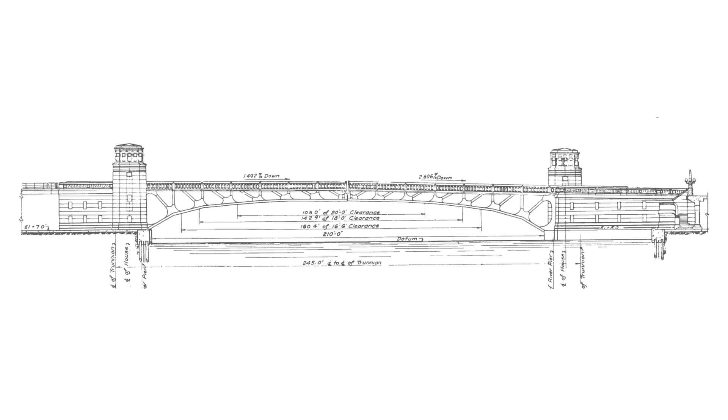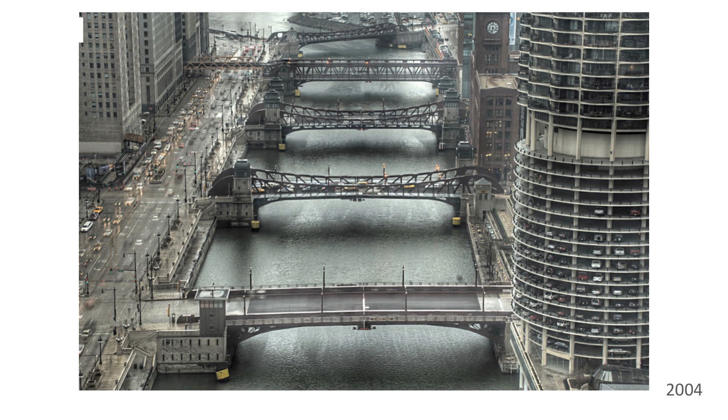This is the State Street Bridge. The only thing is, if you look here, the promenade doesn't go through. That led to the space we were presented with, this little sort of leftover industrial remnant. People sort of knew it was there—maybe they went down when they dyed the river green—but it was a leftover, and a leftover in the middle of our city.

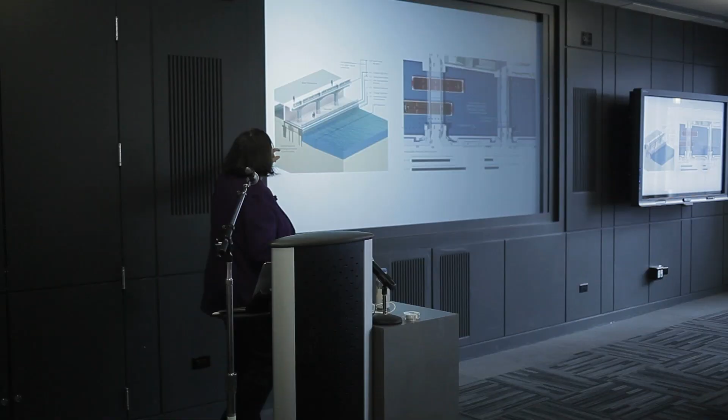There were some other complications to solve besides getting past the bridge houses. Right now you'd walk along that little promenade and come to a stair, a beautiful stair, and have to come back up to the city level. That difference is about 20 feet, so it's not a little bit of difference—going up and down those stairs is not a promenade, that's a workout.

The other problem is the planners in their wisdom only left us about 15 feet of arcade and 15 feet of dock, which is not a civic-size space. So the city faced one of those projects where you think, 'I'll never get this done, it'll take an act of Congress.' This one did. The city had to go to Congress and ask if they could build some additional land, so they could find a way around the bridge houses and get more space for their promenade.

Congress passed a bill called the Volpe Act, which gave the city essentially this build-out limit that you see here. So that was the project: make new land, useful new land, make a public park, and make a walkable promenade.

So we began phase one. The first phase went from Michigan Avenue to Wabash, you can see it there. It was interesting because this is an irregular part of the river, so we invented some stuff to make that work. One thing we invented was what we started calling an underbridge, a way to get under the bridge.

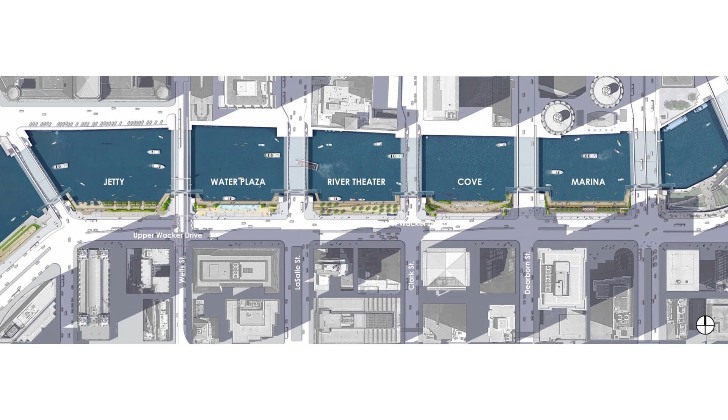And so this is the design drawing that was then approved by the city. Interestingly enough, we immediately got some money. By the way, the total cost of this project is about $175 million for the whole thing—not as expensive, it's about a quarter of the cost of the High Line, if you're keeping track. So even though we have no money for pensions, we do some things very, very economically.

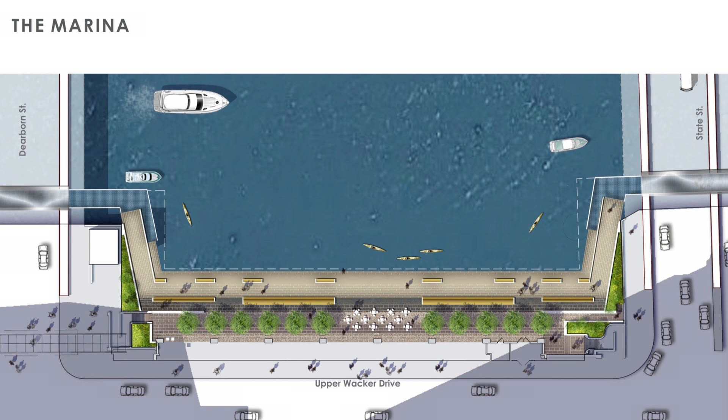So I'm going to show you what we designed. The first room, called the Marina, is designed to allow boats to dock and people to sit. This is the room that City Winery was in last year. When we started the project, the city was adamant that no one would ever pull a boat up along the river—it was dangerous. But by the time the Riverwalk was so popular, we were actually making docks for the boats.

And now this is an income source. It's even, and they haven't sold these parking meters, but it's even more than parking your car, which you may not believe, but it's true.

They weren't sure about businesses, and the city wasn't either. There's only 15 feet in that arcade, but City Winery signed up, and you know the story from that point on. In fact, boats do dock there regularly, so there was a need developing that had to be answered.

What I like about the space is, yes, it's great when it's busy, but if you went down there this morning, it's also a great space. It's a respite in the city.

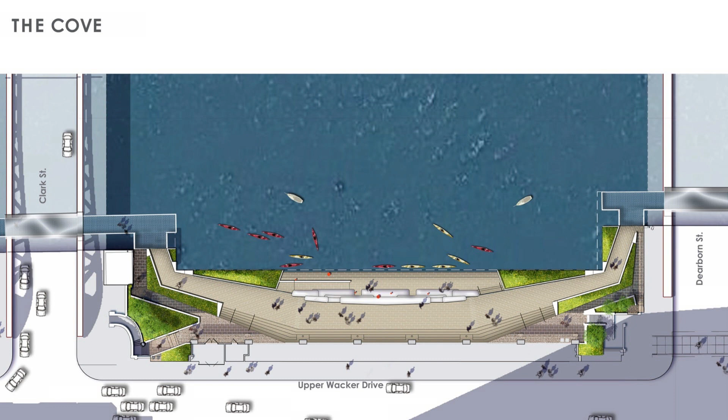The next room is called the Cove, and this room is dedicated to the accommodation of human-powered craft, say canoes and kayaks. Our public process for this was different than some of the public processes we have. Sometimes we have public meetings and anybody can come. This one was different because we met with different interest groups like Friends of the River, Friends of Downtown. There's a kayak-to-work group, just if you're interested in that.

This room is different because it has a freeboard that accommodates kayaks, so we're actually getting down to one foot above the typical river level. The vendor in this block turned out to be a kayak renter, and then Flanders Fries, which was also quite popular.

And the quality of this room changes. You can see the plantings change. It gets much closer to the water. We made benches that look like beach stones, and it changes to more of a beach environment. These plants are beach grasses.

The week after the Riverwalk opened, it was completely underwater, and people said, oh my God, that's a design error—how could they do that, spend all that money? The river level varies about 7 feet, depending on when the water's drained after a storm, so everything we do is designed to be inundated.

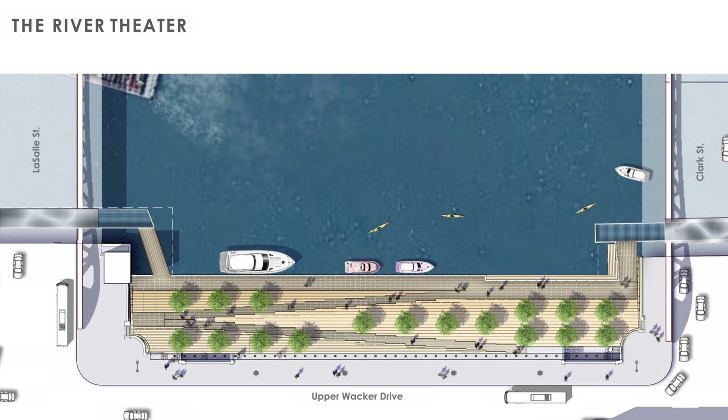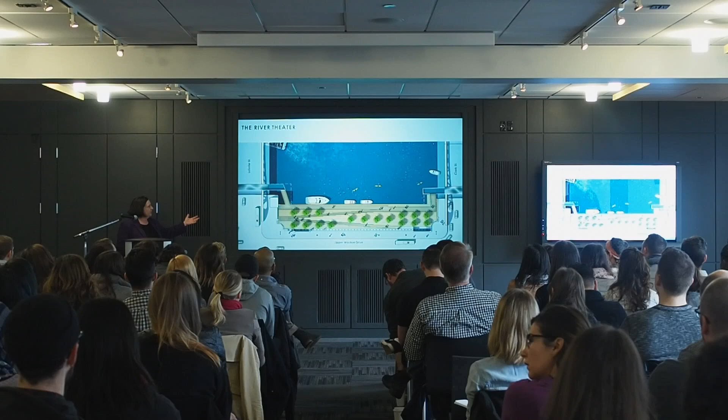The next room that we finished last year is the River Theater. This is at about the middle of all the blocks we had to work with, and at this block we decided we wanted to actually bend the city down to the river in a very civic way, a very welcoming way. Our inspiration was other great staircases, like the Spanish Steps. We were also impressed that we could use that as a theater space, and it has been used that way.

The only problem we had was that the amount of area Congress had given us didn't quite allow for a stair, because of the technical requirements for landings and a ramp. The ramp was really important to us because we wanted the space to be available for people with disabilities. So we designed this.

There's a blog on my website. I had one young man, very intelligent, creative guy, who spent like a year figuring out how we could get this to work so beautifully geometrically, and he wrote a blog about it on our site. So if you're a technical type, read it.

It's really good. Anyway, the answer in the end, in simple terms, was to use risers for stairs in only part of it, and then risers for seating in another part. That allowed us to accomplish a steeper slope and fit it in there, and make it look like it was still sort of planned out and worked.

This room has become tremendously popular. People will just go and sit in the room, and it does, in fact, create that entryway that we were looking for.

One of the things we were also surprised about is the day and night use. We had programmed that in our design, but it was more than we had anticipated. I think in the next phases, you'll see the city doing more light events and stuff like that, too.

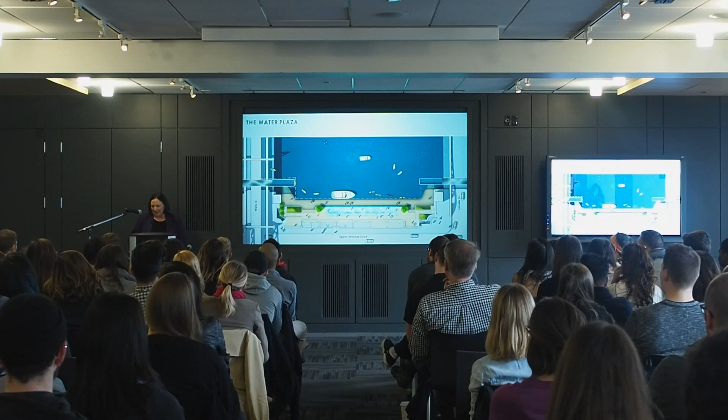I know everyone's smarter than that, although the city has a blind man who's suing them right now—some of you may know him. He's down at the river all the time, wears like a metallic suit. He said he was tapping his way along and fell in the river, so he wants the city to put railings along the river. I think that would be a huge loss if we did that, but like I said, that's another hour of discussion.

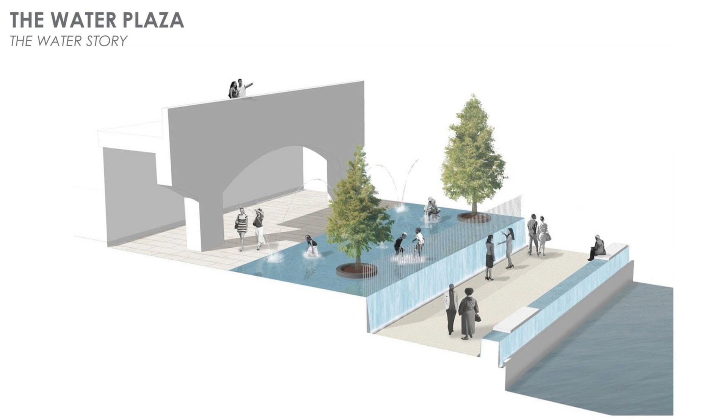Like I said, I wanted to walk on the river. Instead, what we're using is this zero-depth fountain that falls over the plaza, so maybe you'll feel more like Moses walking through—but you'll be able to run your hand through it. The other thing that's a new experiment in this room is this fountain.

We're designing it to stay on during the winter and form ice. We are looking to program the space—opportunities to program it for more than our absolutely glorious six months of good weather.

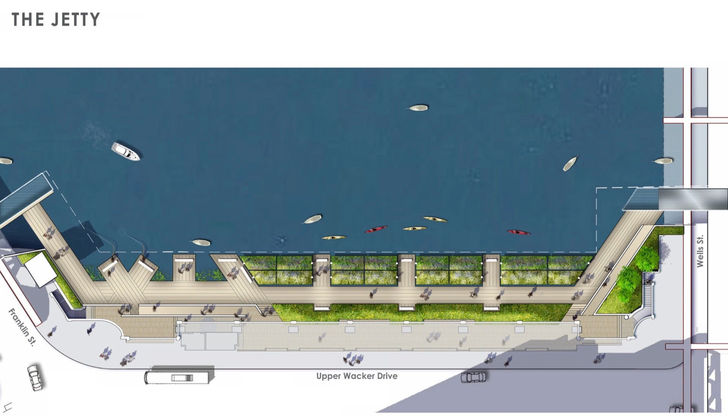The next room that'll open is a jetty. This room will include, of all things, fishing, which was sort of the Mayor Daley—the father's—idea. He wanted to sit by the Chicago River and cast in, then barbecue his fish up on the bank, which is possible now.

You know, the river, as little as 20 years ago, had like seven species of fish, and they were all carp. Now we have 70—you can get bluegill, crappie, bass, all that lives in the river. There's still a lot of carp.

This room will recreate, we hope, what a naturalized riverbank will be. The outer gardens will actually be floating plants, or emergent plants as they're called—they don't have roots, the roots just hang in the water. Then submergent plants, which float in the water but are actually rooted to some media below. The next layer will be inundation tolerant.

In a normal situation, this is how riverbanks in Illinois would develop, and we're going to present that so you can see it here in the city. Even though I'm a Chicagoan and grew up here, I always thought it was a Chicago canal—I also never knew why they painted it green, because it was always green.

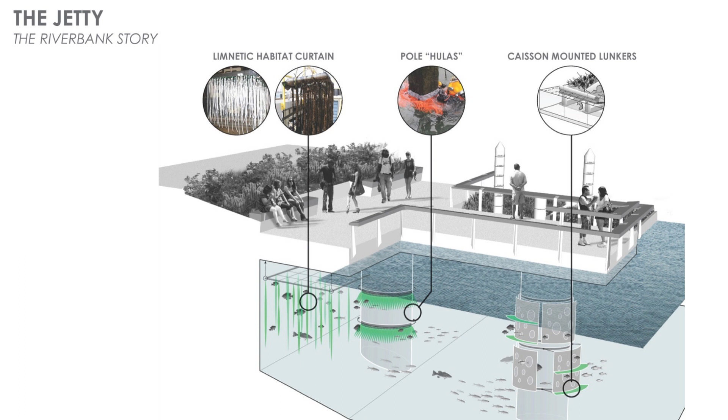But the other thing that will happen is we're trying to create habitats for fish. The fish are already attracted to this area—basically, they eat the crustaceans that live in the roots of the water plants. We're going a step further, providing habitat for them and lunkers here, where we're cladding our columns essentially with steel so they can have little places to hide and live. And then we're also adding additional food sources.

So we're hoping one of the vendors there is a bait shop, a tackle shop, and that you'll be able to fish in the Chicago River and take it home and eat it—or maybe somebody will be there to fry it up for you.

So, I didn't do that right, did I? Nope. How about enter? Nope. I'm a Mac person—I'm not a Mac person, I'm a PC person myself. I know that sounds, when you're talking to creatives—yeah, isn't that terrible? Yeah, please.

So this was the end of last year.

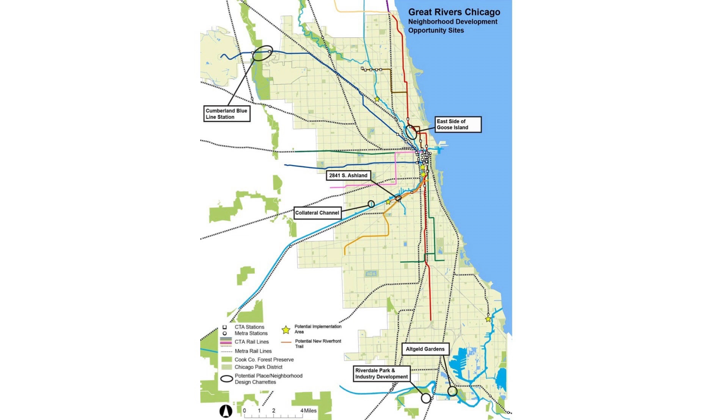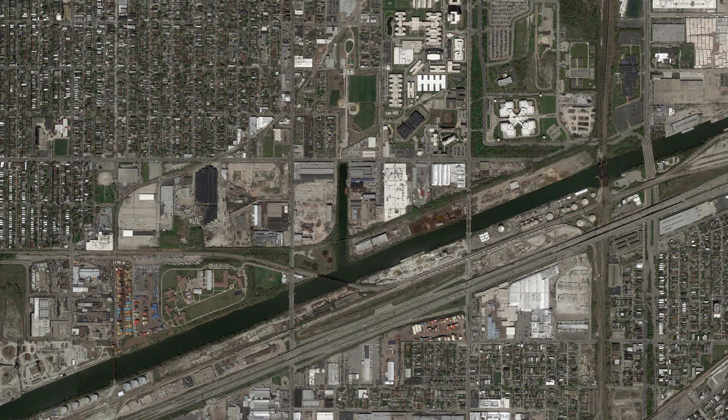That will be part of our report, part of the vision. I want to show you some of them - they're really exciting. I want to show you one of the sites we're working on: the collateral channel, which is in Little Village. The south branch of the river is extraordinarily industrial and extraordinarily polluted. This channel used to serve industry - you'd bring your boats in there, offload things.

Because the river is stagnant, because we're controlling the flow, and because we have a combined storm sanitary system, the collateral channel has turned into not just an eyesore, but a health hazard. In fact, the people in Little Village call it Ass Creek, and I'm sure you can figure out why - the water's so stagnant. But one of the things about our report is we want to stretch.

We want to stretch and see what this could mean to communities, what it could mean to making cities livable. This is possible with the technology we have today. If we build a wetlands here, we can clean the water - this is our vision - to actually make a swimming pool in the channel that would serve Little Village.

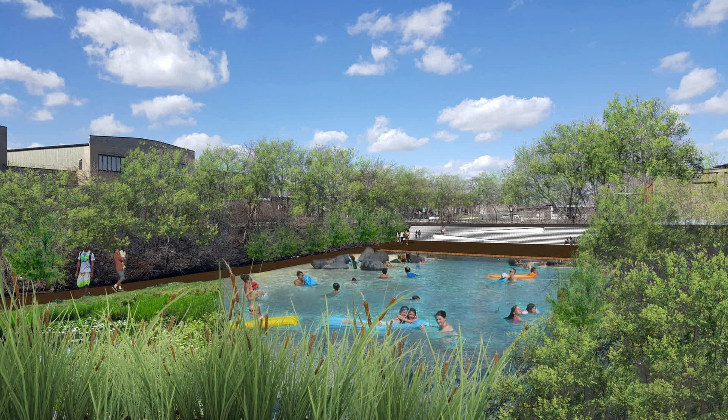This is our future, and this is a change that I'm interested in. If you want to know more about Great Rivers, go to the MPC website and join us. I love Chicago. I want this to be a great place to live. That's the sort of change I'm after. Thank you.